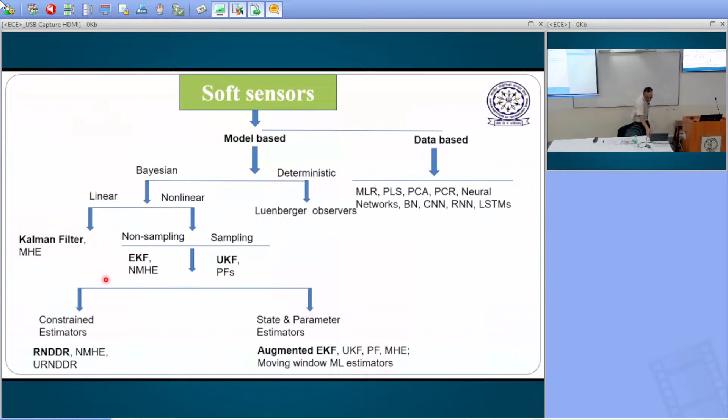Okay, so because the focus is on data driven networks, we'll start with how you come up with data driven networks, or data based predictive models, which we call soft sensors. In order to develop these data driven models, data collection is the first critical part that you encounter. So what do you suggest regarding the data collection? What should it have?

Suppose I wanted to predict today's weather. What kind of data do I need to choose? Should it be only 1 month, 2 months, 10 years or 30 years of data? How do I make my data rich? Is it just more data, or something else? Yeah, that is pre-processing, that's okay. Do you prefer more data points with less characteristics, or less data points with more characteristics? More characteristics, okay. So I want a data set which has all characteristics.

Suppose I wanted to read a person's behavior. I can't read a person's behavior in one day, right? If he's been a friend of mine for the last 10 years, I can predict his behavior better than a two-day friend, because I have seen his different modes of operation and behavior. So the data you consider should cover different process conditions. If you try to model vehicle behavior or weather, recent data or 1 month of data may not be sufficient. You need a good amount of historical data with good features.

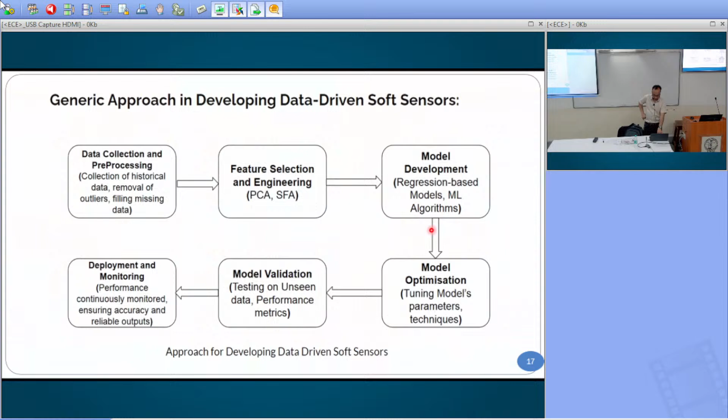So this gives a structure of how a soft sensor or model is developed. You have measurements which are coming at a fast rate, like flow rates and temperatures, and there are some measurements which are coming at a slow rate.

This kind of measurements, like yesterday we discussed one case of health condition where some measurements like temperature can be measured immediately, but there are other conditions. If you want to measure about the process, you need to go do a sample, collect the report and come. Then only we are able to judge what is the state. So these are like sample data which is coming.

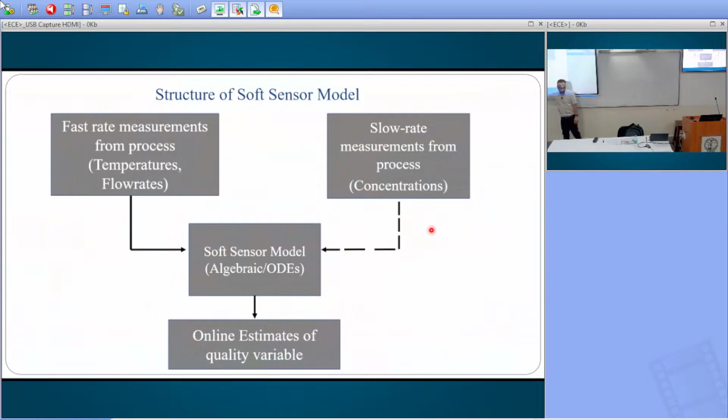So in the case of soft sensor models, I'm going to use both the data which is coming at irregular intervals and regular intervals and come up with a predictive model. Okay. So this is the fusion of it. So let's go step by step and look for a simple regression model, and then slowly we'll start increasing the complexity as we move on.

Okay. So we are going to discuss only the supervised learning part. Starting from regression, we will go into a probabilistic version. We have a regression which is deterministic. From there, we will move slowly into probabilistic, and we'll see how the deterministic regression can be solved in a probabilistic way. Okay. So that is very important.

You'll see why it is useful to study probabilistic modeling, why it is important. It gives a lot of flavors actually. For the research people who are doing it, you can get a lot of problems. Actually, there are good problems to chunk and eat.

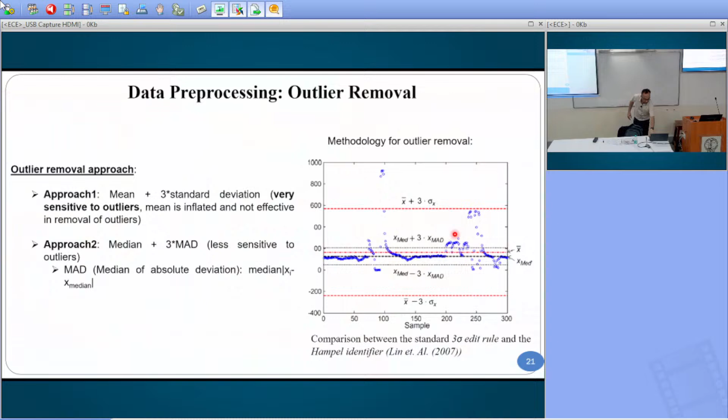There, let's suppose this one. Yeah. So here, I think in two cases you can see. I think here you can see this part and this part. This is a constant value. This is not an outlier. This is not an outlier here. There is no outlier, but this is like a missing data kind of actually.

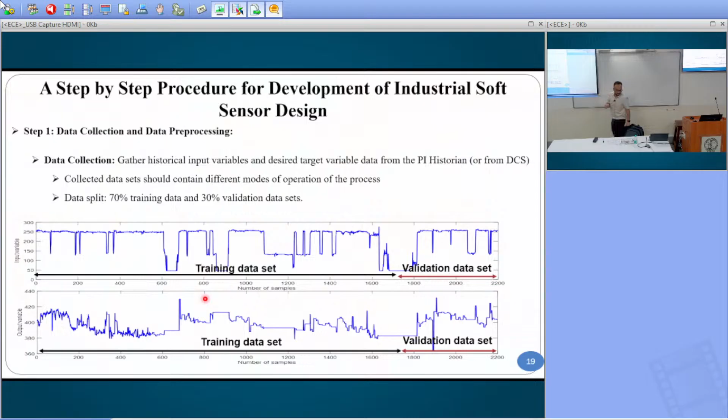So there you can see that the input sensor is also off. It's giving a constant value, and your output data is also giving a constant value. Okay. So these are all the missing data points. It means you don't have a data point at that time, either because of a process shutdown for that particular period of time, or the output lab sample is not available. Okay. So there are multiple ways you can get missing data, with different characteristics.

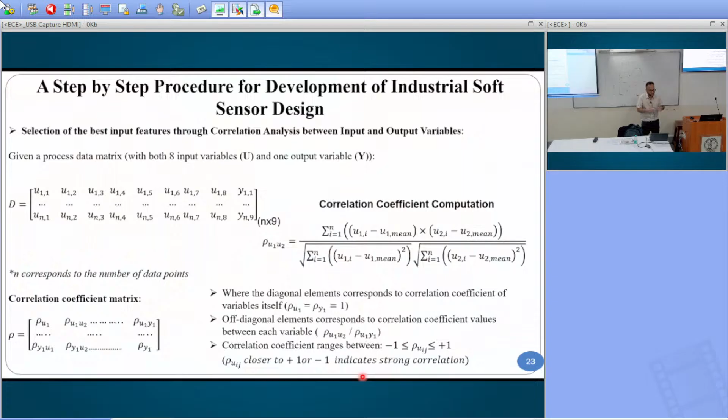The input variables are available. I've selected the model's input information. Now the next thing is which kind of model I want to fit for this particular process. I can start with the simplest model, a linear regression model. Especially since it's not for research but for industrial applications, the best thing is to start with a simple linear regression model and see whether you're able to fit a model between the input features and the output.

And then slowly start changing the models, right from the regression to polynomial regression and using ARX models or autoregressive models. Have we discussed autoregressive models? No? So I'll just give... these are powerful models actually.

Autoregressive models are general, because nowadays when you study transformers and dissect and go inside, what is sitting inside is autoregressive. They are autoregressive in nature, kind of. Okay, I'll just give an example of an autoregressive model. Then when you do your individual projects, you can get a feel of it and try to implement it. You should know about this part.

Yeah, see, the correlation matrix is a linear mapping; it's linear correlation you are trying to find. So correlation between input and output and the correlation between one variable and another variable. But there can be multiple correlations among the variables also. This correlation analysis doesn't do that. It only finds a correlation between input and output, one variable to another variable.

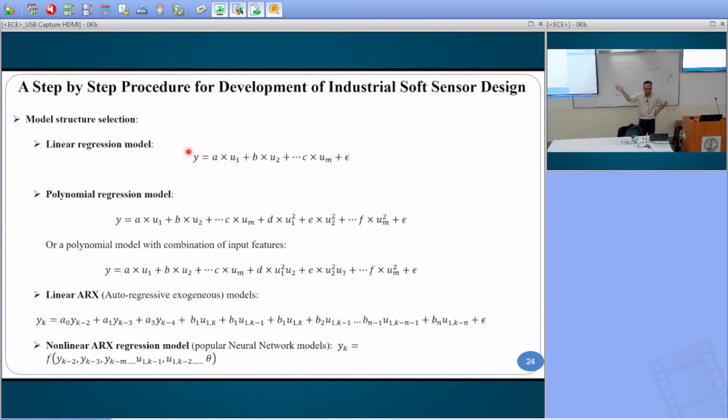So once you choose a model fitting, then what? What are you going to solve in the regression? How do you train? Yes, you have selected some part of data. So you want to fit a model. What are you going to solve? You estimate the parameters. How do you estimate the parameters? Okay, you split the data. How do you then? Yeah, use the least squares method to estimate, right?

So let's suppose you are fitting this model, y equals a into uk plus epsilon. Let's suppose it's a simple linear model. And now you have data, yk data is given, yk1 to ykn data points are given. So I want to minimize this error as close to 0. If this error is close to 0, then this can be my model which can predict my true measurement.

So I want to reduce the error between yk, which is the plant data, and the y predictions. Y predictions are nothing but the model a into un, so the error is y plant minus y hat, where y hat is a into un. This error I want to minimize for a batch of data. So I can do sum of square of errors as one approach, or sum of errors. Can I do sum of errors? Why only square? Minimization of sum of errors. What is the problem?

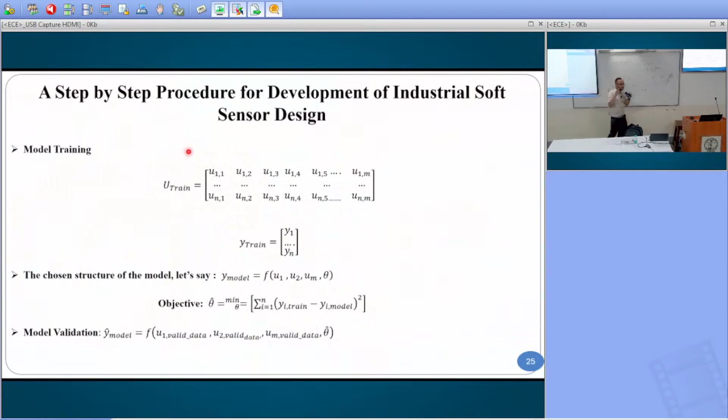Is it clear? So this is the basic structure of any predictive model development, where you start from data pre-processing. Then you decide what structure of the model you want to choose. Then you get into the modeling assumptions and the parameter training. Once you do the parameter training on the training data, you get into online, completely unseen data, and predict on it. As I mentioned, it's an iterative process. You keep correcting this model until it is properly satisfied and implemented in the DCS.

So what if you develop a model and you implement it? Will it work for a lifetime? It doesn't, right? Let's suppose I have taken a medicine today and I'm happy. I monitored my health, was able to predict my conditions, and accordingly took an action. So now the system is in place. Again there will be some trouble, right? There should be some maintenance. I need feedback from the doctor again. Predictive models are also like that. Once a model is developed, it's not a universal model.

The process conditions change, environmental conditions, disturbances keep coming, unmeasured variations keep coming. So you need to maintain your model. Model maintenance is critical in real time. It's not just that you develop a predictive model and leave it. You need to keep updating the model because conditions are changing. When conditions change, new behavior is happening in the process, and the model has been trained on a different behavior. So the model has to be retuned, re-evaluated, kind of re-identified.

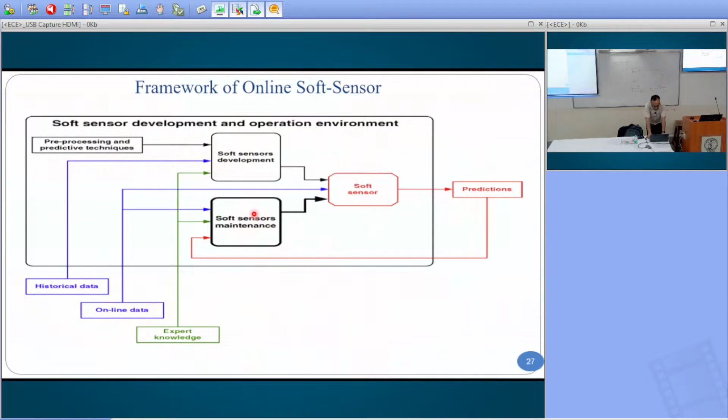Yeah. So let's look at one case study before we get into the next part. So we want to take a break. When did we start? 10. We have 15 minutes. 11:15, right? Yeah.

Let's take one case study before getting into the next part. I want to discuss an industrial case study. It's a simple regression model. In these sessions I am planning to highlight industrially relevant applications. Students doing PhDs can take it as a research project, and students doing internships can look into these domains. These are domains where you can actually go, implement, and make some difference.

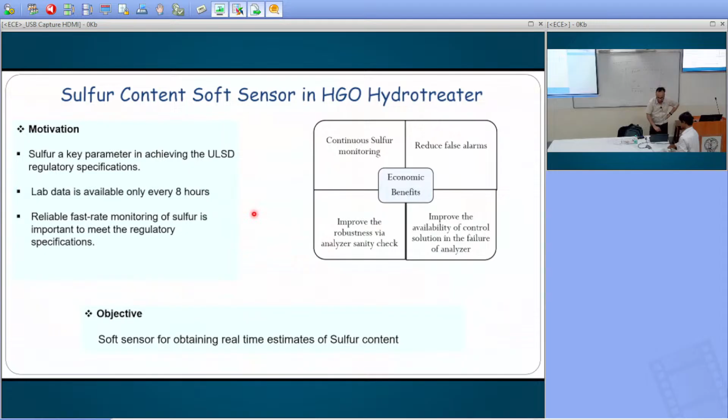So let's suppose this is one industrial process which we have in the oil sands industry in northern Canada. In refineries, you get crude from Ukraine, Russia, Iran, Iraq, and then we do pre-processing of the crude and get the components. But in the Canadian oil industry, the crude is oil sand. In the sand, there is bitumen. They extract this oil sand and do some processing. Chemical engineers can relate to it much better.

So this is a process where they send the crude through different chemical processes, and you get the final desired product. It may be kerosene, gasoline, diesel, petrol. In all this, one thing being emitted is sulfur. Sulfur dioxide is emitted into the atmosphere. So, as I mentioned in the last class, they want to monitor the sulfur emissions into the atmosphere. The sulfur emissions cannot be more than certain ppm levels.

So further, they want to develop a predictive model. They have one analyzer, but there are several units, several plants, not one plant. One analyzer costs around 5 to 6 crores or 10 crores. They don't want to use multiple analyzers at multiple places; they want to cut down the cost of hardware equipment. So the remedy is a soft sensor. This seems a very simple process, but it has many variables, maybe around 100 or 250 variables.

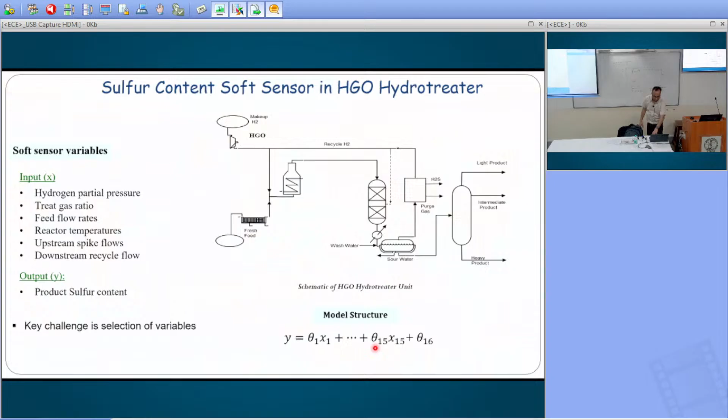Then model structure selection. Which model do I want to choose? The choice of the industry was to select the simplest model, because we want to implement it and maintain it for a longer time. So come up with a very simple model which can be implemented in real time. So we have chosen a simple regression model with, I think here it says 15 inputs, but it's wrong here, 7 inputs. So this is the performance of the model that we have implemented.

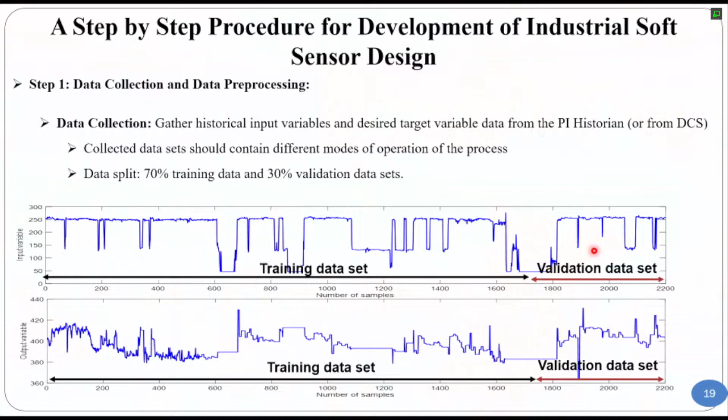But if the input is in a proper operating mode and the output is behaving badly, then you can say there is some problem. So deciding that is key. I don't think you should directly apply outlier tools in machine learning; it can create chaos. Better to first visualize, then decide which parameters and select the ranges of the variables to be considered outliers, and which are very critical points. Or else you keep losing data points and you can't predict those points.

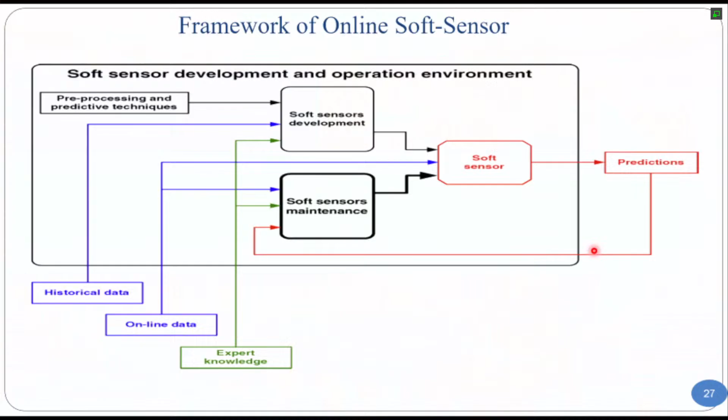Okay. So this gives one example of a simple regression model which has been implemented in industry. When you go to any process industry, you can try simple models first, then start building higher order models.